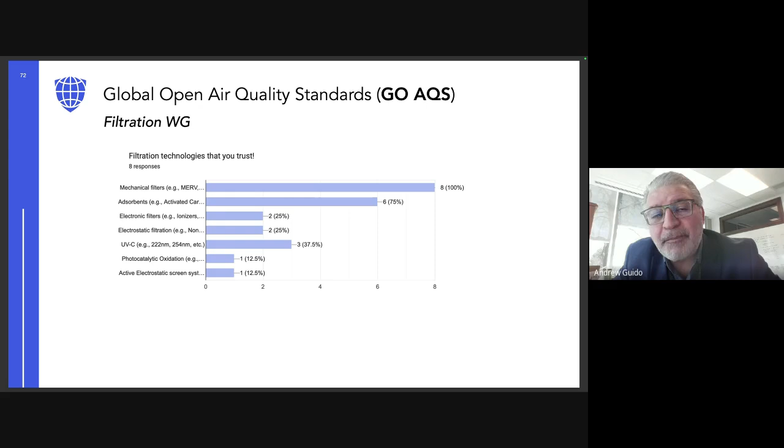So I'm curious, did you test, as part of your test protocol, did you use PDIs, or did you do air sampling, whether passive or active? So we don't—we only do academic and administrative tests.

We don't do lab tests, but in creating our legislation, we did the mental exercise of designing a test that would incorporate these types of byproducts. But the design of our experiment was too expensive and too difficult to demand for each product on the Belgian market. So we didn't fully create a test protocol for it—it was a rough drawing, and even then we saw it wasn't maintainable right now.

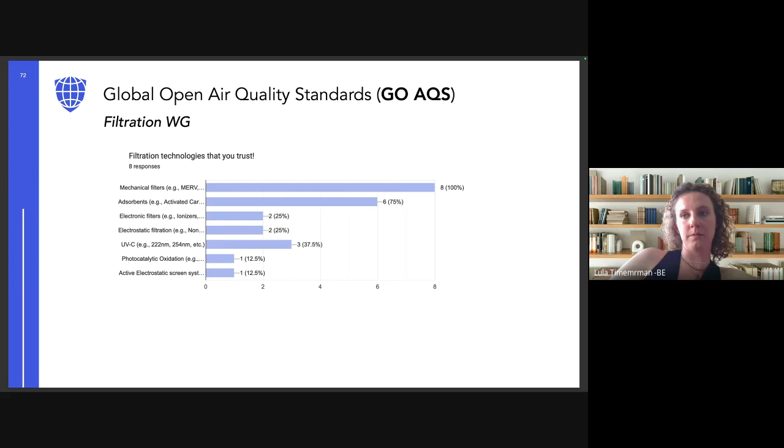No, your microphone. I'm so happy to hear Lula and to hear Andrew. Well, I didn't know Pedro before, but I know exactly what Charles thinks about this. So I'm really happy to hear that you guys are working on that path.

Probably all of you know that these electronic filters work with a high potential difference between anode and cathode. What they are actually doing is causing a corona discharge, which I mentioned in a previous meeting. There are a lot of brands out there explaining their capabilities, but they don't actually understand how the technology really works.

What's the problem with that corona discharge? Well, actually, it's ionizing the air, producing oxygen radicals, which are all biocides. That's the reason they are not allowed in breathable areas.

So I'm happy about that, and I can tell you that testing in third-party labs to ensure what you're installing inside a building is quite expensive. For instance, in my company, for every single installation we do, I don't know the exact term in English, because there might be a difference between an indoor air quality testing lab and one that's part of government administrations.

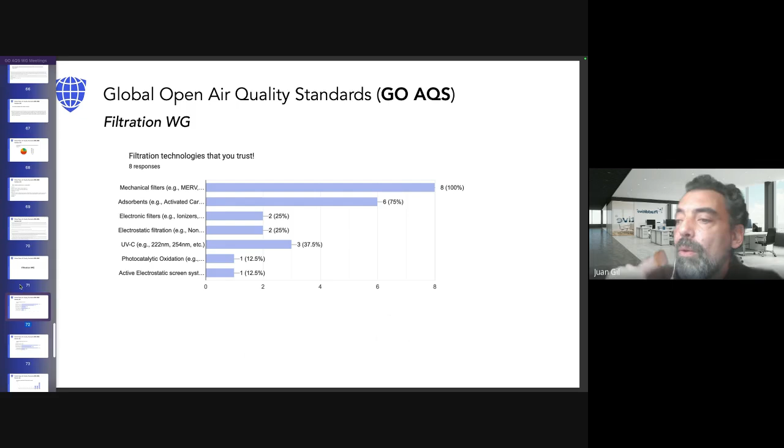Our point is that you're able to reduce ventilation if you increase filtration capabilities with these kinds of technologies. But watch out on what you're installing, because while this filtration increase is good for energy savings, you may be producing a serious problem inside the building based on the usage of biocides, which are not allowed. Lula, thank you very much, because your government is, in my opinion, working the correct way.

Thank you both. To continue the discussion on the slide, we had UV filtration. Obviously, UV filters don't capture anything, they just deactivate or kill some kinds of pathogens. Three out of eight people agreed that they trust this kind of technology.

Then we have the last one, photocatalytic oxidation, which we already talked about a little, and only one person trusts this kind of technology. The active electrostatic screen, I think it belongs under electrostatic filtration, but it was an input from one of the members as an extra recommendation - it actually belongs under that category.

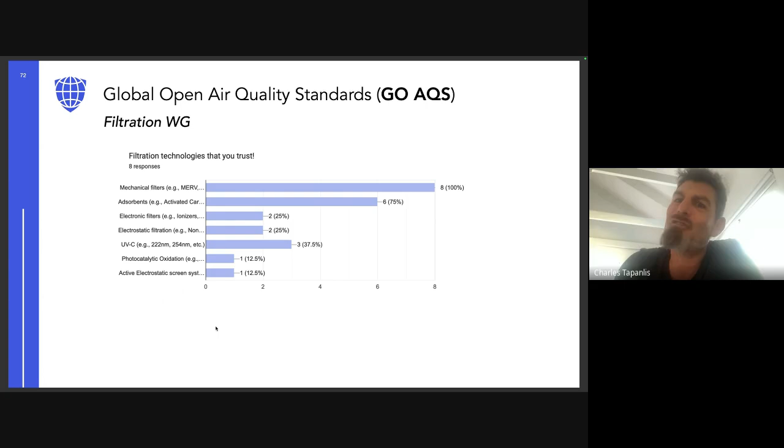It's our product, Soterios, which Juan knows very well - he's been playing with it for a couple of months now. It's based on electrostatic principles, but it's not an electrostatic screen or filter as such in the traditional sense.

And as every coin has two sides, I asked the same question the other way around: which filtration technology do you not trust? We see that for HEPA mechanical filtration in general, no one participated on those, and also the activated carbon type of technology.

But then we do have some conversation happening with electronic filtration. The majority of people didn't trust it, alongside photocatalytic oxidation. I'm skeptical about the above, someone mentioned, and what I don't trust is... I don't remember what they wrote here. Probably they mention misinformation, or the fact that some products, like bipolar, may fall under categories where you either believe in it or you don't - some of them work, some don't.

No, yes, I just wanted to add to the previous slide. Yeah, I mean, it depends.

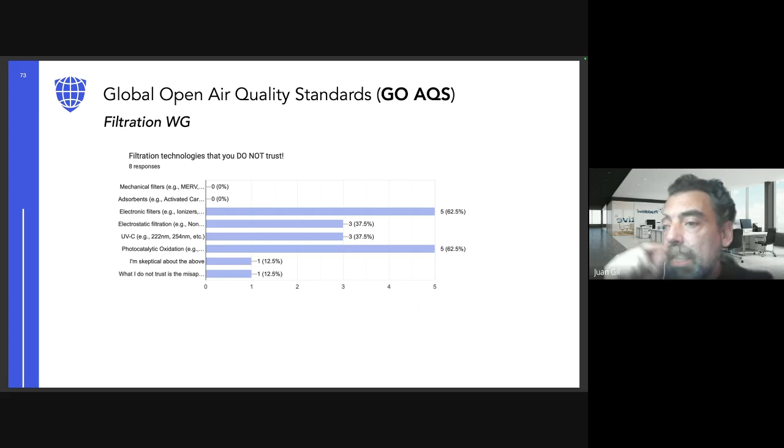That's related to filtration, because your first and most important way of achieving indoor air quality will forever be mechanical filters. That's out of discussion, I guess. But you can use those different kinds of technologies at strategic points, or at specific moments or places in your ventilation and air conditioning installations. But not all of them will work in every single situation. I'm sorry, I know my English is crap.

Just to be clear, that's the reason, Juan, we ask which one you trust, not which one works better than another, but which one you trust and use basically in your work. And that's the reason we receive those kind of messages. But it's okay, sorry.

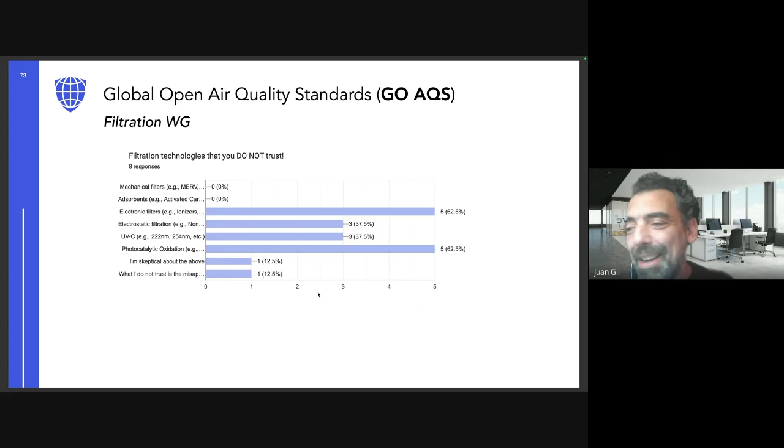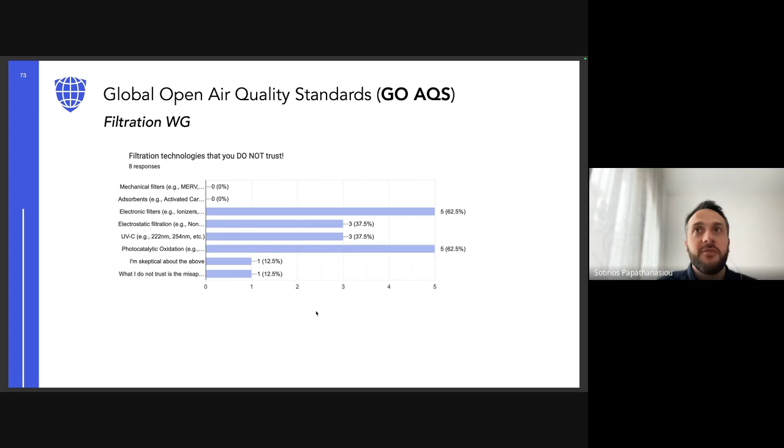Very good, you clarified a little bit further that certain technologies are used in specific applications. And now, when we talk about indoor air quality in residential areas, offices, or schools, maybe some of them are not the right tools because of all the problems they may create while they operate, right?

Always first try to remove the pollutant or filter it at the source. Obviously you have to remove the pollutant, but outside it's not the case, right? Like if a wildfire is happening, what are you going to do? That was one of the questions raised during other sessions this week, like how we can keep up with excessive ambient air pollution, and how we can protect occupants in buildings with limits that may not be easy to achieve in those scenarios.

I don't know if someone has any comment on that. I mean, the limits are the limits, in my understanding, and whether something outside of our control is happening does not mean we should be more flexible. Does anyone believe the opposite or otherwise? I would like to hear.

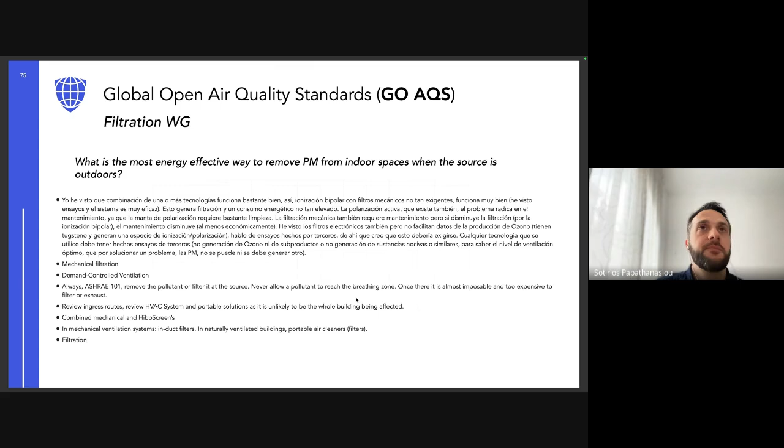What is the most energy efficient way to remove PMs from an indoor source when the source is indoors? Now, it makes sense to say that you have to remove the source, right? It's on your hand probably to do so. Again, they're talking about bipolar ionization, the soft version, mechanical filtration, portable solutions, freestanding HEPA or HiboScreen, portable air cleaners, opening the window, filtration, mechanical ventilation are also in the comments.

Yes, Juan? I just wanted to add about this slide that even when I said that electrostatic technologies, even electronic technologies, work fine in combination with filters, I have to reckon that based on our measurements—well, when I say our measurements, I mean the third-party labs—if the source is active, then the results are really weak. So this makes sense.

If you are doing a sort of previous analysis on the pathogens or the problems you have, and you are pretending to combat those problems with different technologies combined with filtering, yeah, the first step always has to be to stop the source of the problem you have inside, right? Because otherwise, if you are pretending to use even our technology, and I have to recognize that, we realized in different situations that we were expecting to have a really good result, and then our result was not that good.

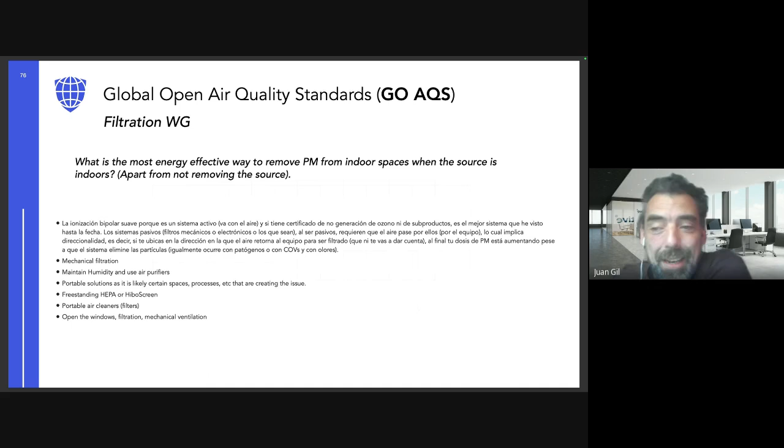I'll explain that in a very simple way, because I'm a smoker, as you all have probably noticed, and yeah, we are able to reduce, even remove, smoke particles from the air, even the odors. But if someone is smoking, you won't ever be able to get rid of that. So the first thing is just to take that guy smoking outside and not inside the building. Does that make sense? Yes, absolutely. Okay, cool.

Yes, when we talk about a source of pollution that's from the inside, you have to remove it, right? It's more in your hands, possibly, than a source that is outside the building. That's the reason I specified in the question, apart from removing the source, right? But okay—what is the most effective, energy efficient way to remove PM from indoor spaces when the source is indoors? They also mentioned those kinds of details, which I don't remember who wrote, but if he's here, please elaborate more.

Charles, I see you have raised your hand. Yeah, just one quick question or statement with regards to removing PM from indoors. Presuming already you've got decent filtration that works, surely recirculation is key, because recirculation—actually I didn't see it on the slide—and adjustable recirculation being potentially incorporated.

I think they're referring to the portable purifiers with recirculation. Maybe we can consider them as recirculation as well, right? Yeah, correct. But I mean, you've already got a filtration system, and you can adjust the amount of recirculation to basically filter it out using your existing infrastructure, no? Yeah, of course, if you have a central system that can handle something like that—like closing and now recirculating the air from the inside, yes, and adjusting the mix. Yeah. Yes.

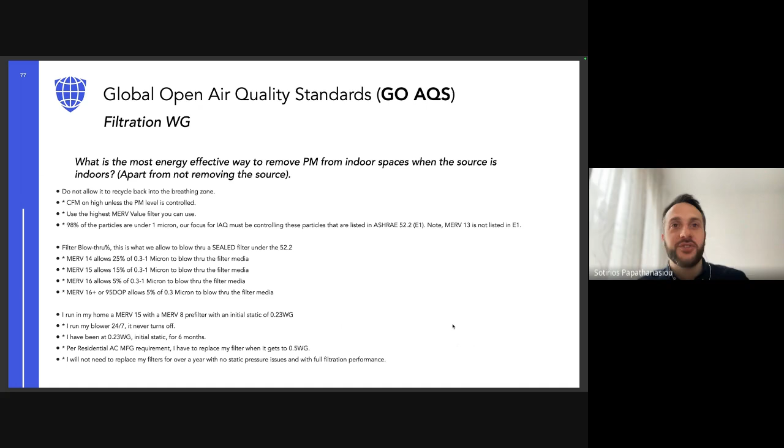For example, they say: I run in my house a MERV 15 with a MERV 8 pre-filter, with an initial static of 0.23 inches WG. I ran my blower 24/7, it never turned off. I have been at 0.23 inches WG initial static for six months. Per residential AC requirements, I have to replace my filter when it gets to 0.5 inches WG. I will not need to replace my filter for over a year, with no static pressure issues and with full filtration performance. I want to say that was Mac, but he's sick and not here today.

Ventilation is another way. If you don't have a mechanical ventilation system, you have to open a window or two to create cross ventilation and flush the pollutants outside.

Has anyone tried to use water in order to remove some of the gases, like NO2, for example? I have seen those as well, but I don't know how well they work. There's a company that uses water aerosols to decontaminate spaces from biopollutants under high pressure, but not from gases.

I had a few meetings with a guy called Ioannis from FCA Hygiene in Greece. They're developing and beta testing a water-based solution for both filtration and gases. So maybe we can assume it's at an early stage to use water in order to remove some of the gases from the air.

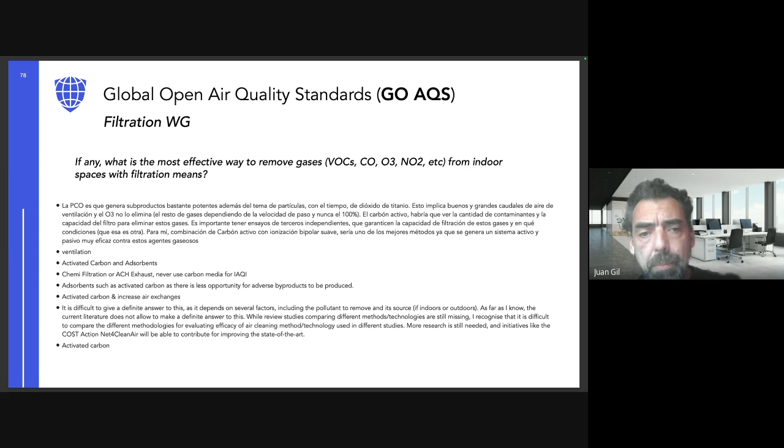No, I just want to add that we have wide experience in reducing VOCs indoors, and once again we do that based on electrostatics. So you may understand that whatever passes through an electrostatic field will be affected by that electrostatic field, depending on the strength of the element or particle. I'll try to explain that again.

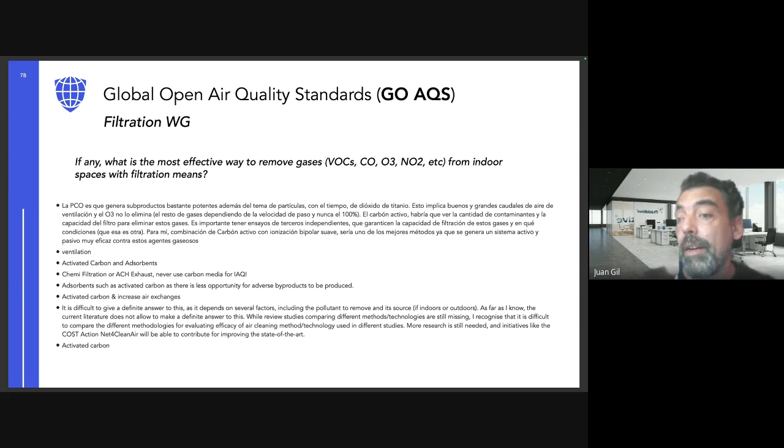Just consider that every single element of the chemistry table will have an ionization energy, right? So whatever passes through an electrostatic field and has more ionization energy than the energy produced by the electrostatic field will be able to cross that energy field without being affected, right? But if it has equal energy or less, then it will be affected. So why am I explaining that?

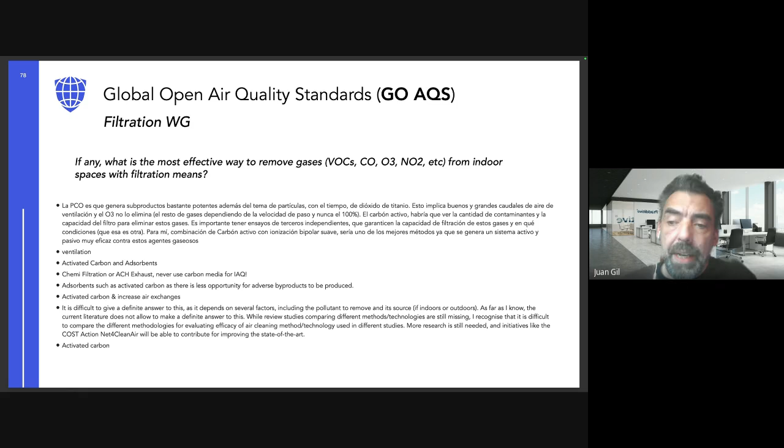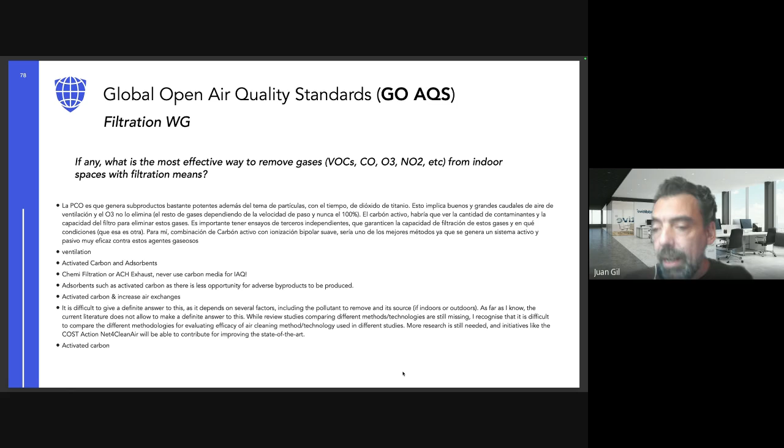Because we have wide experience on reducing VOCs, particularly VOCs, which are basically carbon chains. The carbon bonds are pretty weak compared to other elements such as oxygen, as an example, right? So based on electrostatics, we have already certified in the most well-known European chemistry lab, which is in France, called Terra Labs, that we have reduced concentrations up to 60% of total VOCs indoors, right? While we were also reducing particles, working in combination with the mechanical filters.

So if anyone is interested in that, I can share some of the results. We have reduced even acetones, which are pretty tough to reduce because their bonds are stronger than the average VOC carbon bonds, right? So I'm available to any one of you if you are interested in that, because we take what we are doing on indoor air, reducing pathogens and analyzing before and after, really in a serious way.

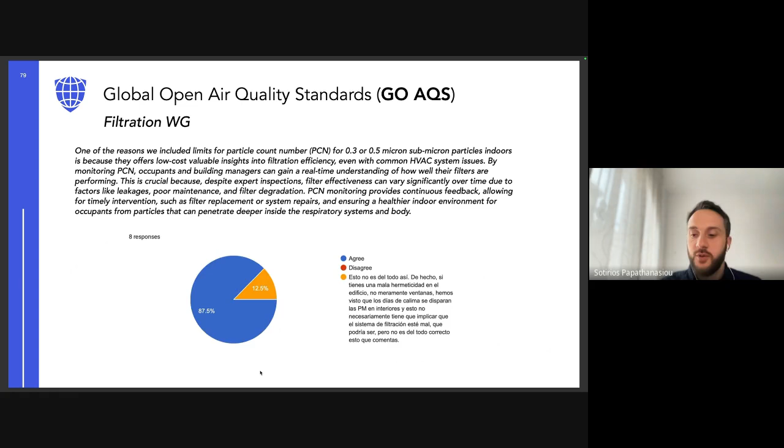And finally, we have some open comments from this survey. We should include HVAC AC systems, the System 52.2 Seal certification. We can run the best sealed air filter, but if the system is not sealed from return to supply, and everything in between, we have failed in our IAQ efforts.

So basically, they are saying that it's very important to have a very robust system, especially when we talk about ventilating systems and HVACs, and not have leaks all over the ducts and maybe around filters, because our efforts for filtration and keeping indoor air quality will never be profitable. Critical factors taken into consideration for trust include reliability over time, maintenance requirements, dependability, and impact, etc.

The literature in air cleaning filtration of gaseous and biological compounds is still scattered and with limitations. There are different methods and technologies for different gaseous compounds, and different studies usually use different methods to quantify the efficiency and efficacy of the methods and technologies, which makes it difficult to establish a comparison. This is true. I have seen this example many times. Moreover, the state of the art is changing very fast on this topic.

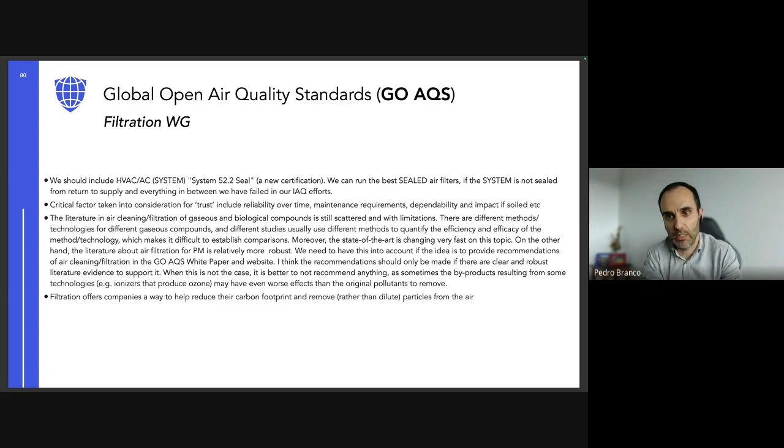And just a final quick note, maybe it will be interesting to contact Professor Xavier Querol directly. He's from Barcelona, and he's probably one of the world's biggest experts in ultrafine particles. He's leading a group there in Barcelona and has a lot of studies on the health impacts of ultrafine particles, which will be quite interesting regarding this discussion of including them in the future, which I assume is already decided, and I agree with that. So I think it could be interesting to contact him.

Thank you. Yeah. I will meet Professor Querol in Barcelona, as we are both invited to speak at a conference there in October. I have already reached out to him about joining GO AQS, but he was really busy and couldn't, but hopefully I will convince him in person. Sharon, please.

Hi. I think that last comment might have been mine, but it was such a long time ago that I filled this out. What that specifically relates to is portable filtration as opposed to HVAC filtration. So where a hospital might want to increase the number of air changes an hour, if you increase the HVAC system versus adding a portable air filter, there is a difference in the carbon footprint.

But it also leads on to the fact that if we do have a filtration standard, it should be different for portable air purifiers versus built-in filtration in HVAC systems, because they won't be the same. Right. And thank you. Now it makes more sense, right?

When we talk about a portable air filtration system, yes, you do have the benefit of not losing energy and heat from within the building, because you rely on this kind of technology to capture the possible pollutants, whether they are pathogens or just normal PM particles floating in the air. Thank you so much for this comment.

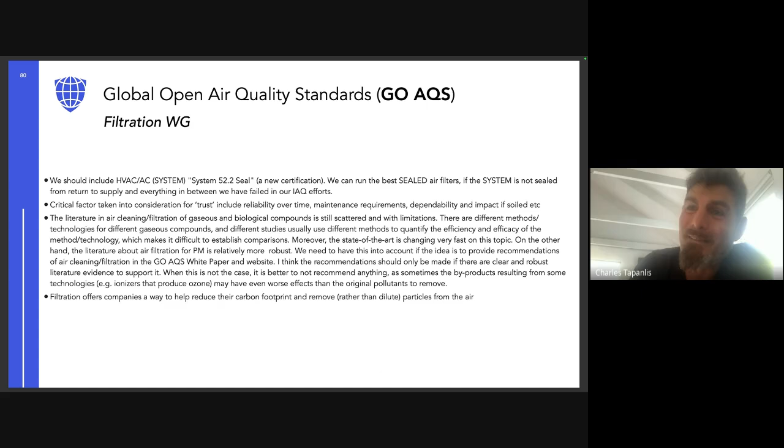And then Charles. Yeah, I just wanted to thank Pedro for raising such an important point. Gracias. It's really important what you brought up. Thank you. Yeah, that's all. Perfect. Thank you. Juan, you have a comment.

I just wanted to add something about portable filtering. That's one of the main reasons why the European ventilation standards, and also the American standard, say that if you are going to use air cleaning systems, you may have to consider installing them not only in the ventilation system but also in the air conditioning system, and both should work combined as a whole.

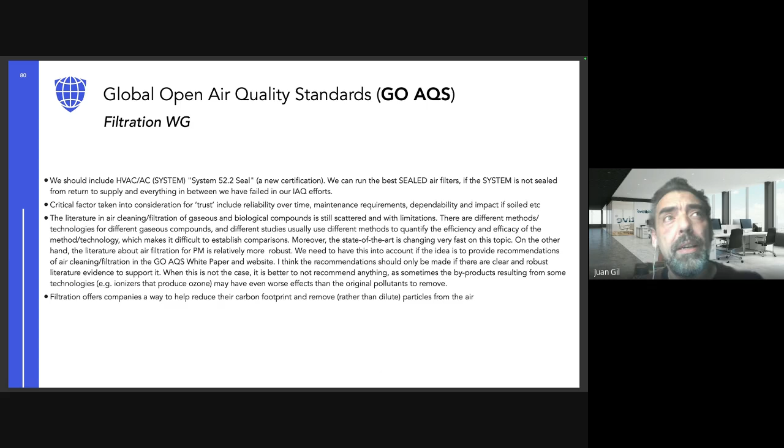So if you look at this ventilation standard, not the European ones but the American ones, they are not prohibiting the use of portable air cleaning systems, but